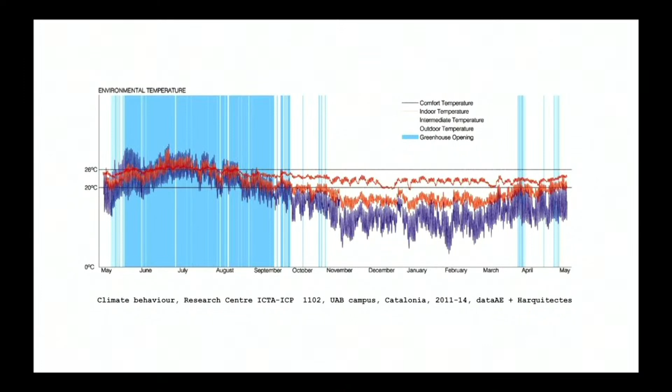In this graphic that I'll show you later, there's an important thing to understand. This shows what is happening in a building and outside during a whole year, from May to May. There are four important things. The first is these two black lines describing the legal comfort range, between 20-26 or 21-27 depending on the regulation.

Then the other lines moving up and down are important. The blue one is the outside temperature, going up in summer and down in winter as usual. The other two lines are very important: the red one is always kept at the right temperature. But the other one, connecting back to the Zanuso house, represents spaces inside the building that are not following the legal regulation of comfort. So it's important to discover where this can happen in a building.

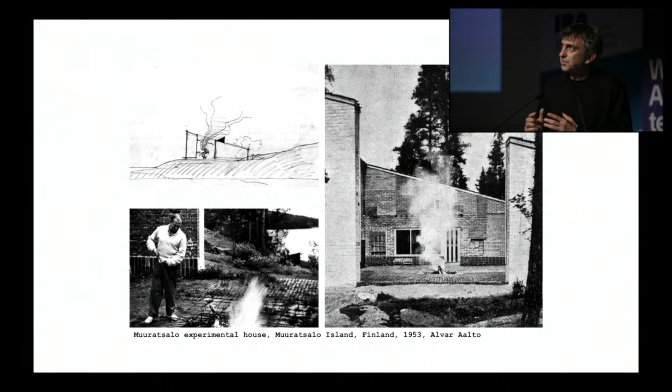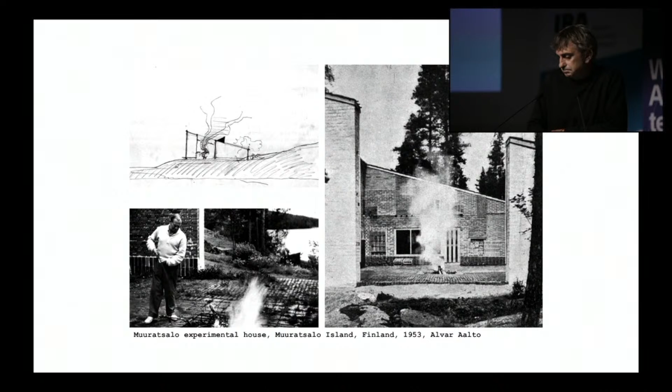Again, it's not only about the weather, it's also about the relation between man and nature, but not in a romantic way. It's more connected to the skin. We are men, we are kind of animals, and we need to be connected to nature. I think that in the case of this fire, in the middle of this amazing courtyard, it's powerful in terms of architecture, but also in terms of what the people there are feeling.

And it's interesting because you can know this story, and that's always interesting, but it's not necessary. If you go to Bologna and face the facade of the Basilica, you don't need to know anything, but you can feel this idea of the passing of time, the things that happened to that building, and after all, the aesthetics of that building. I think that's important. It's not always about rational thought, it's also about your perception.

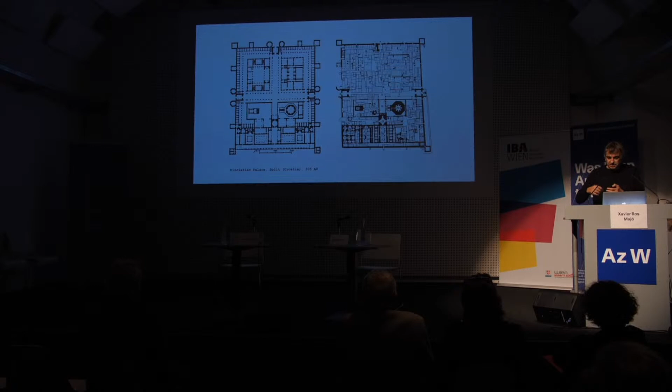Today I visited the Basquiat Exhibition in Albertina's museum. Super amazing, and I realized that you can look at one of the paintings, and if you go close, you can imagine what happened during the painting with different layers, some scratches, and a lot of things, a lot of layers that are involved in the short history of the production of this painting.

I think that in architecture, this could be described with this picture of the Diocletian Palace of Split. There is a starting point, powerful, amazing, very precise in terms of style, kind of building, very homogeneous in a way. And then what happened to this palace during centuries?

Again, it's interesting in terms of history, because knowing things is interesting, but it's not very important, because if you go there nowadays you see these streets, the new buildings that have probably been built using the stones of the demolitions of the original buildings, and we don't know why, but some of them are kept and arrive to our days. So it's a kind of collage, this kind of palimpsest with very different layers, where all of the layers are creating a very specific soul.

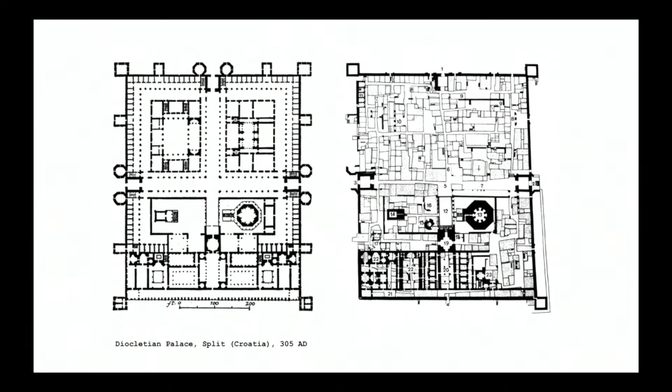Of course, I think the starting point is very relevant, so nothing can be understood or felt without this first step. But after all, it's the mixture of different layers, different constructions, very casual situations that arise and create, in a way, a new thing, where all the things that happen, all the centuries, all the scars of the story are kept there, giving a very specific soul to this center of Split.

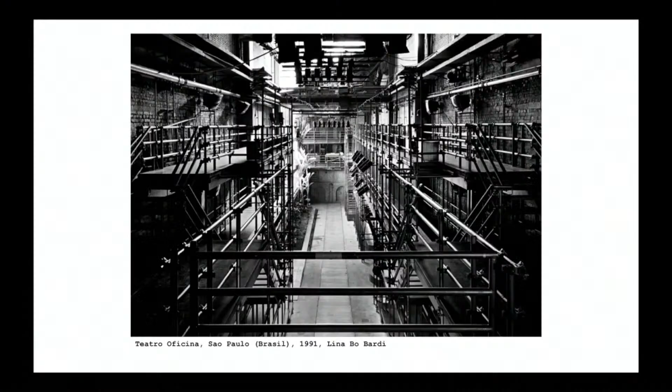And not in a casual way, like the Diocletian Palace, but when working in a pre-existing building, it doesn't matter if it's a heritage building or not. I think that sometimes it's interesting to be bold, it's not a holy thing, so sometimes you need to demolish, transform, add, do whatever is necessary to transform - in this case, burned offices into a new theater, adding this greenhouse facade, the scaffolding, and technical things.

Almost everything is new, but the presence of the old parts, in fact just the party walls, is essential to understand what is happening there in terms of architecture. And it is also interesting, not only this idea of new and old creating actually a new thing, but also to understand that a theater, which historically has been an archetype repeated with some variations.

But with long life, let's say, it can be transformed thanks to the architect - in this case Lina Bo Bardi - who understood or imagined that a theater can work as a kind of long street, and it doesn't matter if it's narrow or high, because the theater that will happen there would be shaped, thanks to the limits of the architecture in a way.

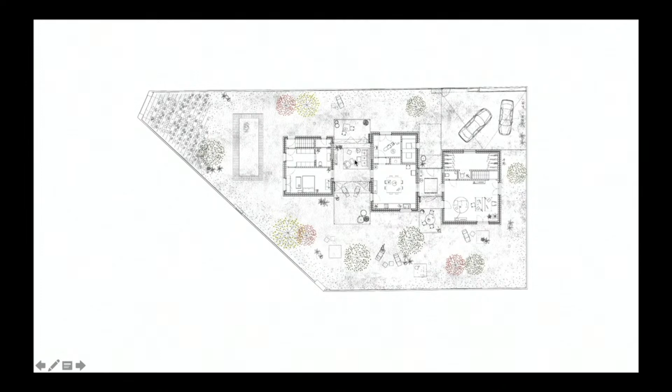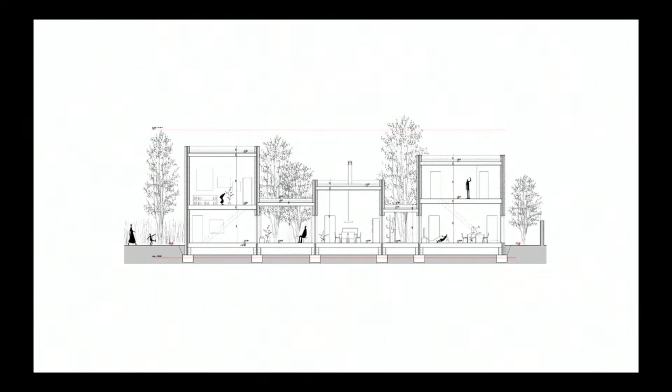You can understand here how simple it is. So the three boxes and the two galleries or porches connecting the two gardens, using a very basic system: flat load-bearing walls, double walls, because there are no buttresses, so they need to work together thanks to very basic steel connections, you will see later, and that's all. So it's a very typical system, as you can see here.

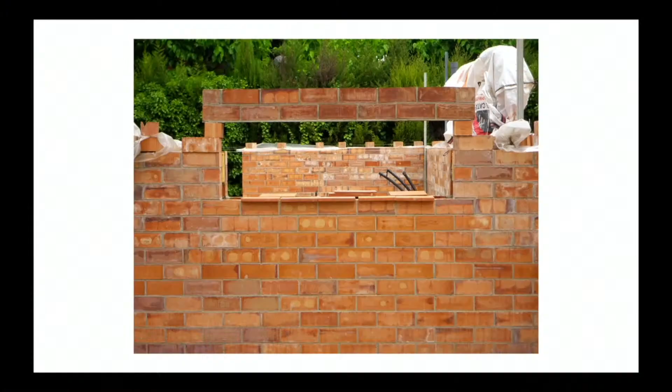These are the connectors, so both of them are load-bearing walls, they are working together. During the construction, we improve everything thanks to the workers, let's say. In this case, we changed the design of the lintels because the worker proposed a solution and we loved it, we tested it a little bit and it works.

The brick is the most basic one. It's for structural walls, but generally covered by mortar or different layers, not in this case.

In this case we decided to keep the same kind of walls without painting in the galleries, expressing this outdoor condition, this space in between. As you can see, showing all the basic systems of construction, having a lot of inertia, which is very good in Barcelona. Inside the boxes, the same structure, the same walls painted white, with just one or two windows per space. And the kitchen, which is very high.

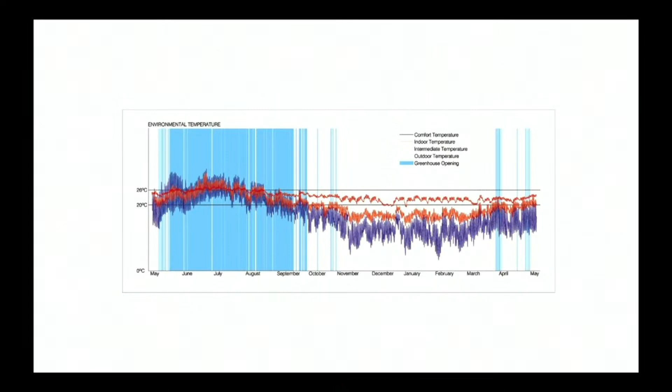In summer, you can decide to be on the ground floor, which is much more fresh, and in winter on the top to have breakfast. So again, it's up to you.

The building is very simple, so we have a heavy structure, post-stressed concrete framework with these columns. We have 4 atriums, vertical patios that connect all the levels and of course work as a kind of chimney. We have these rows of offices made of wood, and then all these spaces that are meant to work in a less formal way are scattered throughout the building.

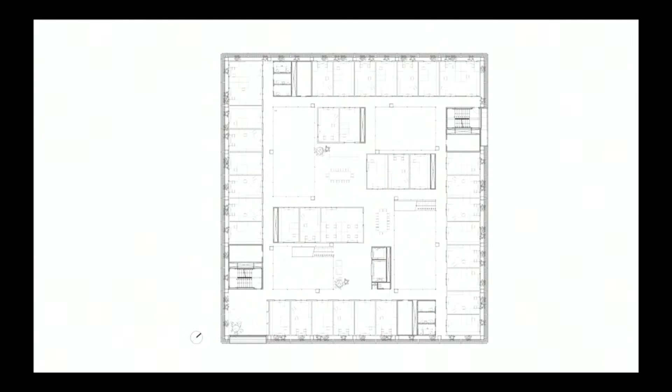Then we have the skin with these polycarbonate windows that can be open or closed. The building works, as I said, as an organism, because in winter it's closed and in summer it's super open. So we have a lot of air crossing the building, and it works very well.

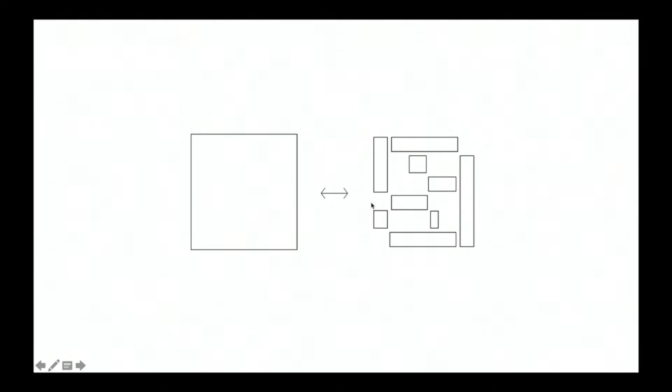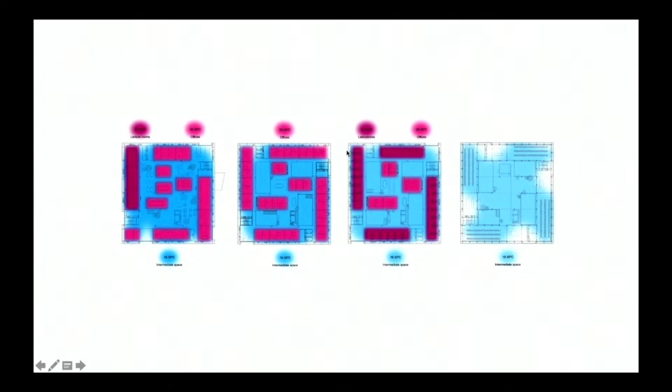And again, in this case, this is the space where the ambition in terms of climate is low. So you need to wear shorts in summer and more layers in winter, but it's the only way.

And this is one of the corridors, and you can see the greenhouse system on top. It's interesting because even though this is really inside the building, the light and air feel like an outside place, and always better than outside.

This is a laboratory, which is a closed system, so we just push the air crossing the slab and collect it in the same system, but you cannot open the windows because it's very specific and clean air. In the offices, a system opens or closes the windows depending on the needs of the people and the conditions outside.

So it's controlled by a computer system. Of course the user can decide if he wants to open the window, but if he leaves and the window is open and the system decides it must be closed, it gets closed. So it's a mixture.

It's very complex, the building, but we made the slab lighter using these pipes where the air crosses the whole building. So when the air is cold it refreshes, and when the air is warm it dissipates the energy thanks to the concrete mass. So it works very well.

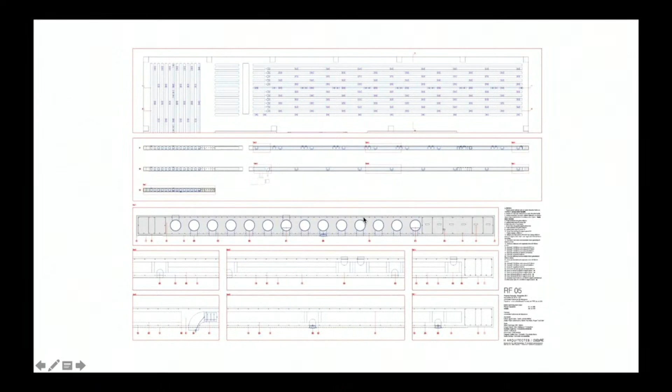And we have a refreshing pipe system on the bottom, and then with the pavement we have a layer of pipes to get warm. And this is the construction.

So it's very complex and beautiful, the picture. And you can see here the post-stressed bars that after pouring the concrete we screw in, and then it has tension to support more distance between the columns.

And this is the result of the building. This is a big campus close to Barcelona, and this is the typical building they have in this campus. This is the energy consumption, and these two lines are the simulation and the real graphic. So we reduced the energy consumption by half.

And I think we increased the real comfort a lot. But reducing it by half means, I think, about 100,000 euros a year, which is a lot. And today the energy cost is very high. This was 7 years ago.

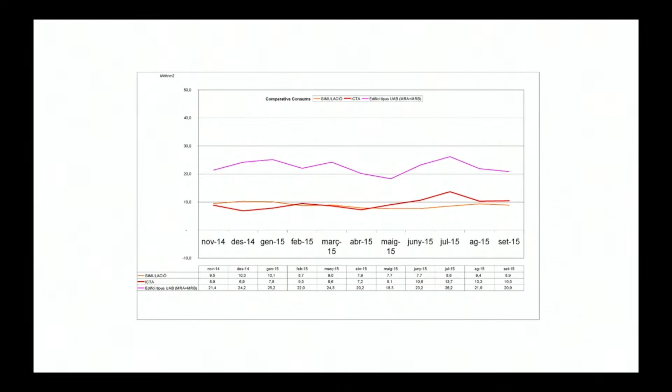Fluid matter, yeah, as architects we generally design not the fluid matter but the solid one. But what we decide about the solid affects the fluid matter totally - meaning the air, the water, and so on.

So in this case, this is a civic center, or kind of civic center, in Barcelona. We create a kind of big tool to improve the temperature. So the whole building is a tool to create comfort in a natural way.

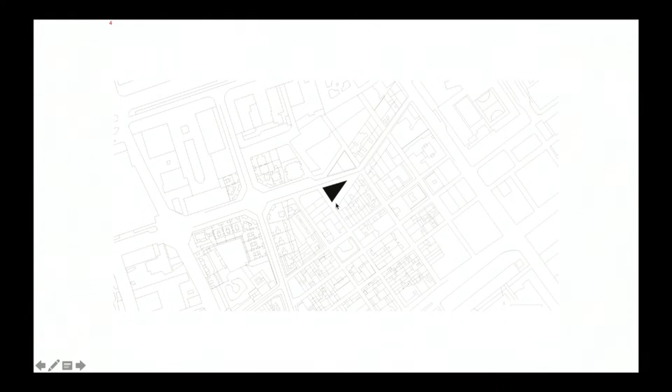This was a former big glasswork factory from Barcelona, close to Diagonal. But they demolished almost everything, and when we won the competition, I think the factory was very, very big, but what arrived to our days is just this triangle - not the triangle, but the single facade, this L.

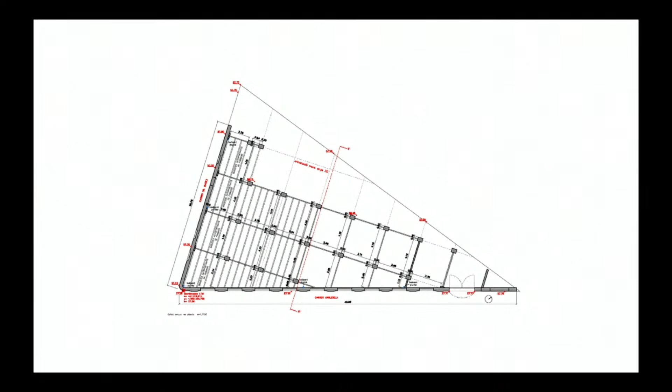And the rest is just a structure to support the facade, and that's all. So we had to demolish all the structure and keep the facade, because it was a heritage facade. So we had kind of conflicts with the patrimonial and heritage people, because, well, it's not an excuse, but sometimes you need to convince people that aren't easy to convince.

Now the thing is we started the project with these big walls that we have here, and we implemented the same kind of walls throughout the whole building to create a new structure. The geometry is very strange.

It's a triangle, and we decided to put a kind of greenhouse on the sunny facade, then classrooms facing this greenhouse, and you'll see these big gaps on the wall that connect with the chimneys, then a corridor, then the small program where the triangle gets smaller. Then another atrium, a very vertical one, that is the entrance. So we used load-bearing walls and massive concrete slabs to have inertia.

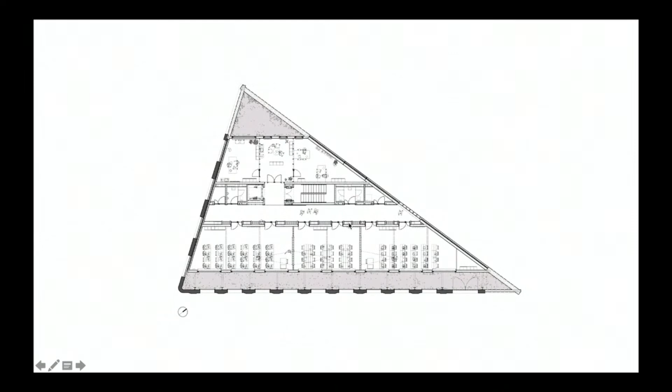So you can see here one of these classrooms during construction. We have this window connected to the greenhouse, and these gaps on the wall connected to the chimneys. So the air crosses from the greenhouse to the gap and goes up.

Thanks to the chimneys. So it's a very risky project because we decided to renovate at the maximum times per hour - 11 times per hour, which is the maximum, using only a natural system.

And in fact, using the sun during the summer, which is the enemy in Barcelona. These chimneys on the top create a very specific landscape in the city, but they are tools that remove the air very fast.

So the air crosses the classroom, goes up through these pipes, and in these pyramids that are the base of the chimneys, the temperature gets very high—70 to 90 degrees. It means a lot. This difference of temperature creates the movement.

And it happens because of the sun. The geometry of the pyramids is the best to have more sun exposure during the whole day. So it's not about aesthetic—it has an aesthetic consequence, but it's a very scientific design in a way.

And it's important to remove the air during the day, and we have also an extra tool to refresh, which is the pavement. We have pipes with fresh water, but not much, for if necessary, and also in winter.

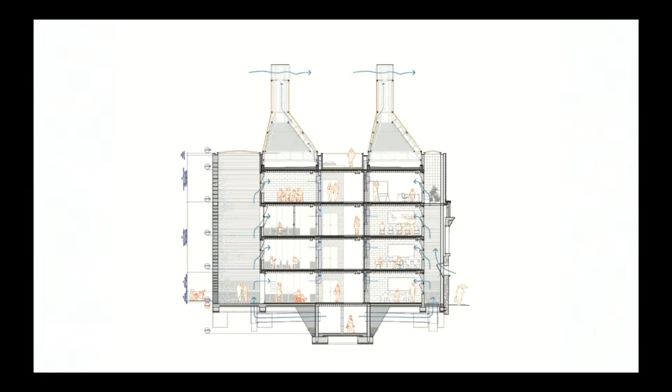But what is important here in Barcelona is not to remove the air during the day because the temperature is so high—it's to remove the air during the night, because at night it goes down enough to refresh the whole building. And to refresh the mass is the secret to use inertia to create comfort.

So the chimneys work also during the night with a very basic system you will know—the Venturi effect. Thanks to the changes of size of the gaps, the air goes faster and it's removed, sucking the air from the bottom. So it's very simple, this is the strategy.

In winter, everything is closed, just to renovate—we circulate the air maybe once per hour, depending on the people in the classroom. In summer, it's always open during the day and also during the night, the same strategy.

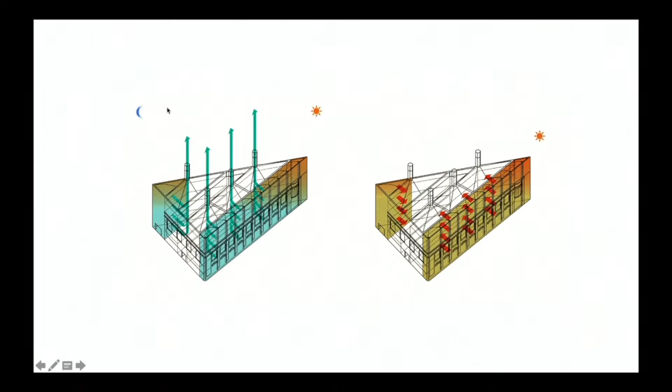We manage these schemes and simulations using engineer software. We don't know how to use it, but we make all the decisions about that. We put options on the table, they study them, they improve them, we discuss. We're at the same table and the same level, but we make decisions because it's about architecture and we are architects.

We do this kind of drawings for El Croquis magazine where we try to express everything related to architecture—space, structure, proportions, air flowing, temperature, everything.

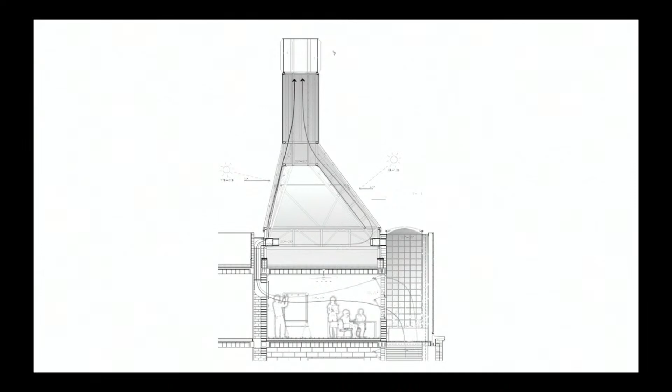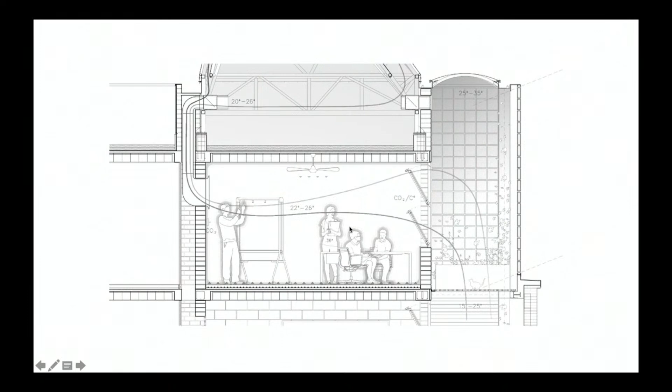But focusing mainly on the people, because people are our target. So architecture is not an excuse—everything is decided around the experience of the people, and experience means all: space experience, skin experience, feeling, temperature. So we actually believe in a kind of global atmosphere where everything is involved.

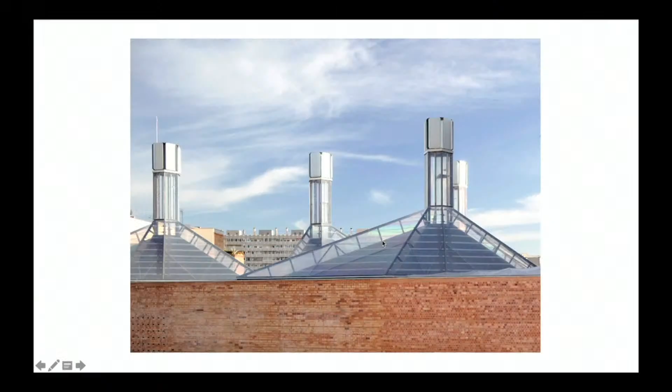So we try to draw it in these drawings for El Croquis for each building. You can see here the chimneys with this black membrane, and the air that moves between the black membrane and the HVAC and the chimney.

As I said, we have a heritage facade here, and we increased the height of the building and the chimneys. So for us, it's important—we started from an old facade, we create a new one using the old, so everything is new here. And you cannot understand what is happening without feeling the important things of the old part, but they are working together in all the ways.

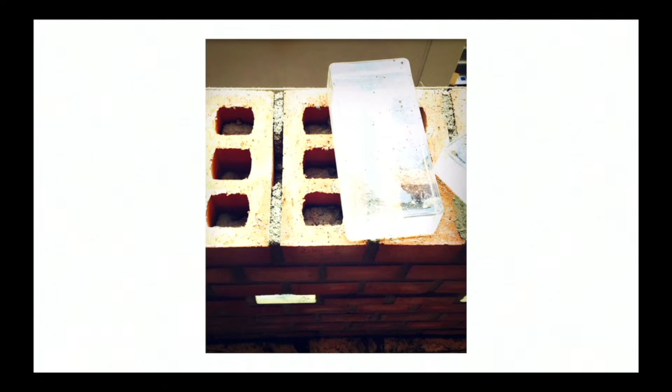I told you something about that using Lina Bo Bardi's Teatro Oficina—it's an important idea for us. So for us, working with heritage or not-heritage buildings, just a pre-existence, is always an opportunity to transform, because we need to give a new life to the building, so we need to be valiant to make good decisions on that.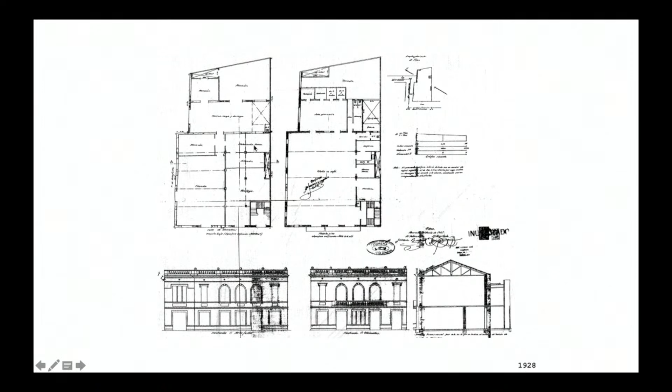We had on the ground floor a shop, and on the first floor a kind of theater. The rest of the building, you can see here the shop and the theater with these wooden trusses that are still there. Then the rest of the building was a kind of spaces to support the theater - I don't know, a kitchen, small pieces, and the rest was for storage, so nothing interesting. Everything was almost destroyed by the second uses of this building.

So we arrived there in 2012, I guess. The building was divided in 3 parts: the main one, the more public one, and the rest, these 2 parts. Our strategy was to create a kind of new street where the users can fastly be orientated inside the building to know where to go, because it's a center used by very different people, new people and common users. So it was important for us to make a clear decision: to create this street thanks to a demolition, a total demolition.

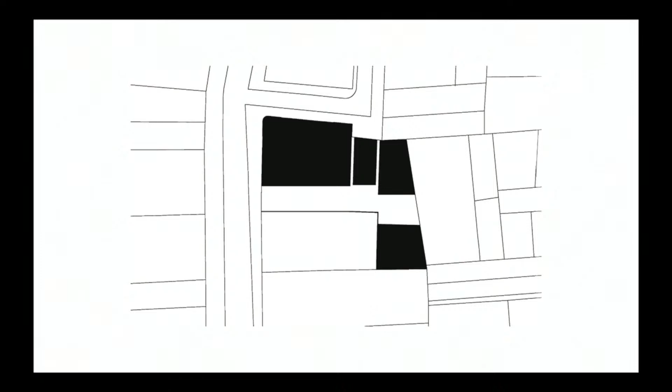You can see here that we proposed this demolition, and we also added a very strategic element inspired by Teatro Oficina of Lina Bo Bardi - kind of a scaffolding, where everyone can recognize where to go. The stairs and these kinds of passerelles, everything very fast and very easy.

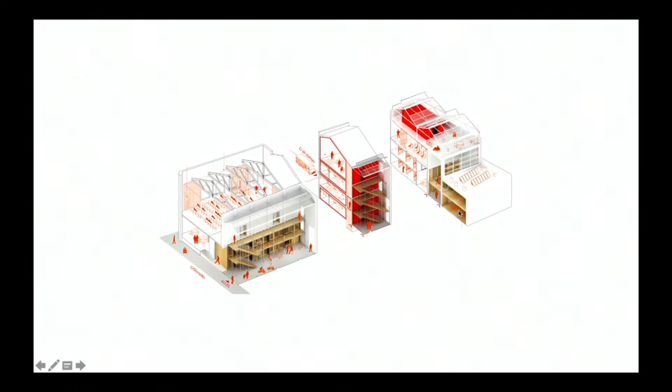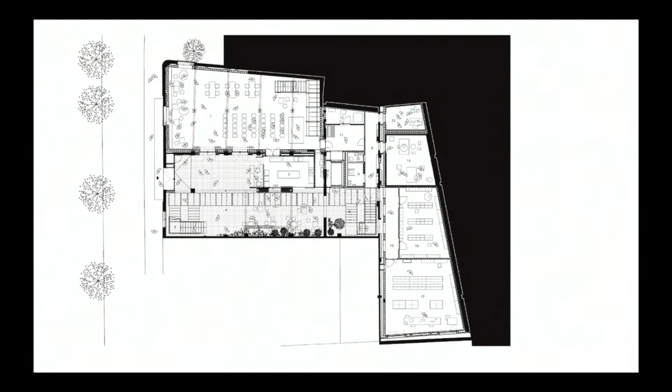Everything here is almost old, and everything here is almost new. But also in this part, where the structure is totally new, you can recognize the original elements that create a very special atmosphere effect. So you can recognize this street, the different pieces - so not very interesting in terms of plan. This is the main strategy: to transform and recover the theater and the former shop, and to demolish all this part.

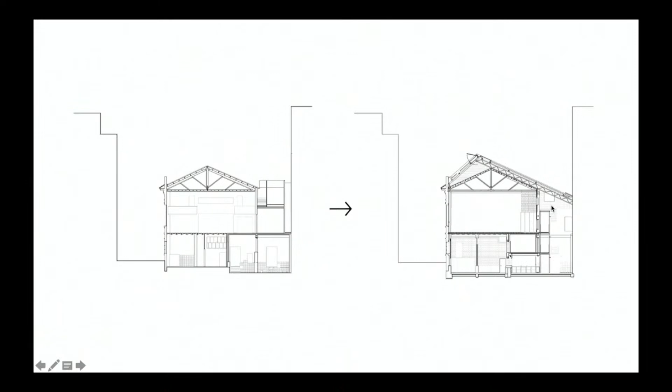As in the Chimneys building, the roof becomes more simple, but still a chimney. So we have an air chamber here, and the air crosses the whole atrium and goes up thanks to this window. And you can see here again the original facade and the new things, but working together as a totally new building.

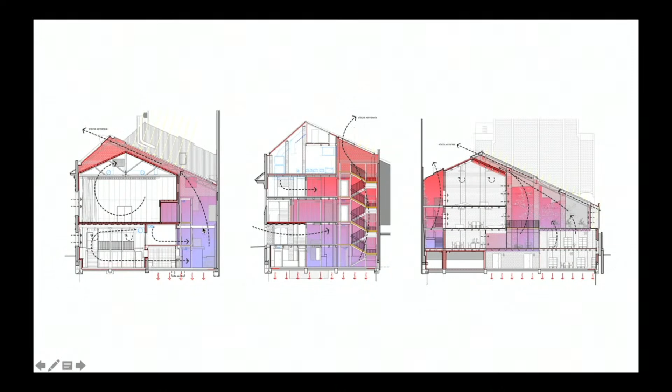Again, the strategy is the same, trying to understand where we don't need artificial climate. In this case, we need artificial climate in a lot of classrooms and so on, but the thing is that we push air inside the classrooms, and the air goes outside and is removed in this street. So we improve the temperature here thanks to the artificial systems that we have in the inner parts.

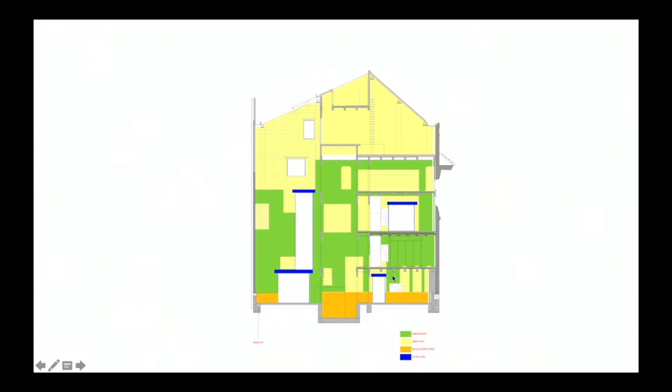If you look at this moment here, with these 3 windows, new door, green wall as original, and the new one in yellow, and this kind of plinth that you can see here, the old, the new, the plinth — everything is working to support the slab. So it doesn't matter if it's new or old, it's the same, it's a wall, it's a load-bearing wall. This creates, for a structural strategy, a very specific aesthetic effect.

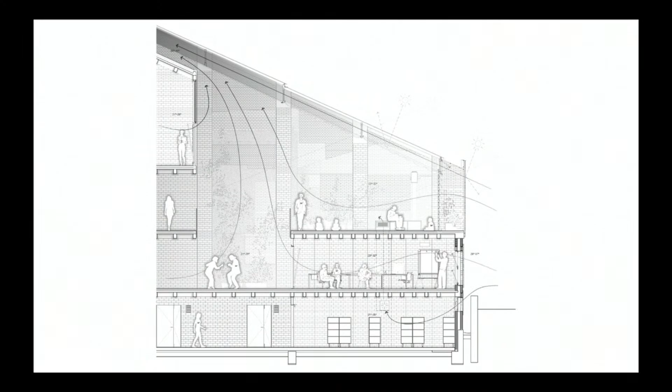This is one of the main spaces of this project, where you can see the drawing, the people, the air, the systems, the temperature, everything described in the picture. The truth is this is the new part, but thanks to these big gaps, it's not possible to understand the building as something new. Trying to keep the spirit of the original building was something important for us.

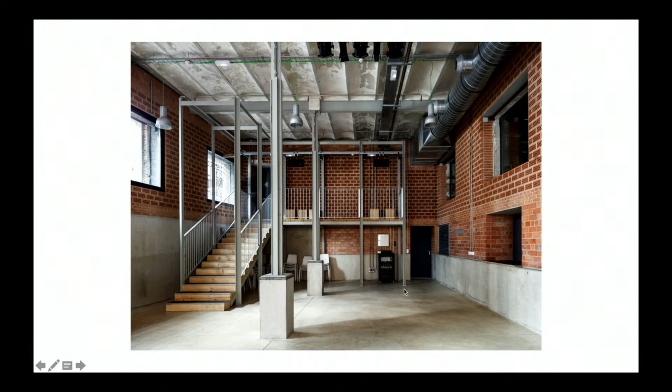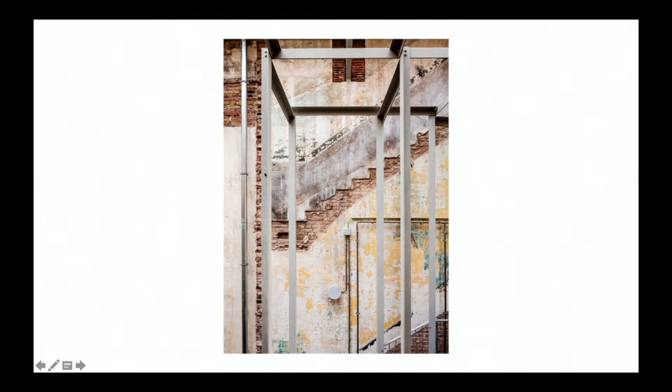This is the atrium. There's the entrance, the original party wall, and the new scaffolding, the passerelles and the stairs. So it's very easy to understand how the building is organized. These scars and cracks from the process of demolition are kept there, creating a very special atmosphere, mixed with new structure, new bricks, and the scaffolding structure of the stairs, and also all the systems for light and so on. So everything is new, but nothing could be understood without the old parts.

I will not explain every brick, but every brick has an explanation, because it's a good way for us to make decisions — to give reasons why we use less height to connect with the irregular skyline of the original wall, why we use the cheapest brick for the structural wall, why we use this U filled with concrete and steel bars, etc. There's always a reason why we use a certain size — the Catalan size, quite bigger than the Spanish one we use for the new structure.

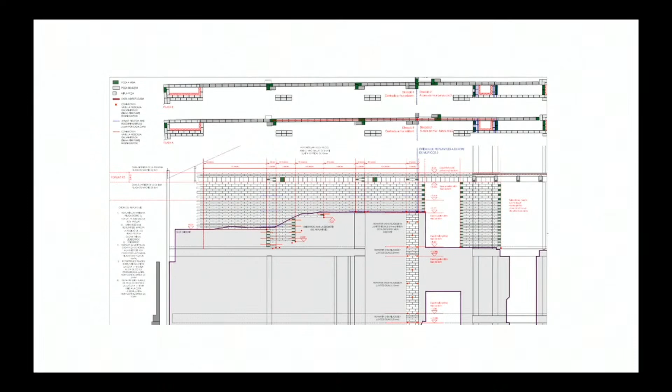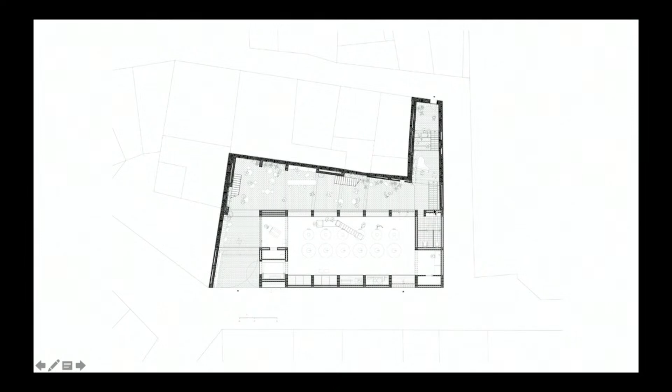Very fast, because I decided to include this project since it's a new one — the idea of total space, which I explained a lot about. This is the idea that everything is involved in the space, and in this case, for this project, which is a winery in the south of Catalonia, in a very special area called El Priorat, a wine region. The project is very simple: we have the hall to create the wine here, and then there's a kind of street, a corridor surrounding this box — a very specialized box, a kind of cathedral for wine, and that's all.

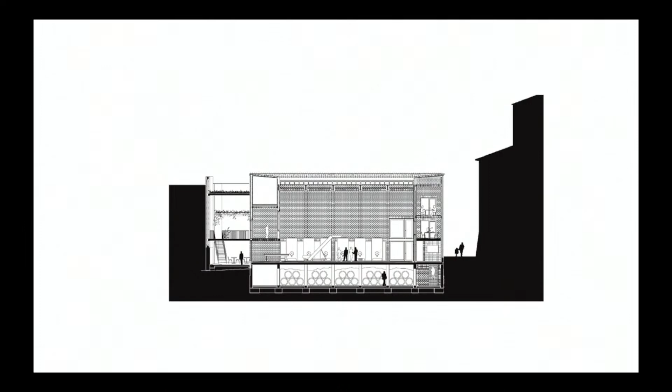So we have the wine production here, where we have very high demands in terms of regular temperature. It's very important to have very little variation of temperature during the year. This is the section for this kind of street where everything is open, just roofed, and that's all. The ambition here was to create this total space, a kind of super height, because the air increases in temperature here and goes up, then is refreshed and goes down thanks to these chambers that are between the walls.

You will see later a very simple system, with more layers on the south with the sun and fewer layers on the north, and it works very well. After 2 or 3 years, the temperature is very, very regular. The tanks have a kind of serpentine to change the temperature artificially, and it's mandatory — there's no other way to make wine.

It was not necessary to have very regular temperature because we have machines. But if you create a good atmosphere, a good temperature, you don't need to use a lot of energy to create artificial temperature in these serpentines that surround the tank.

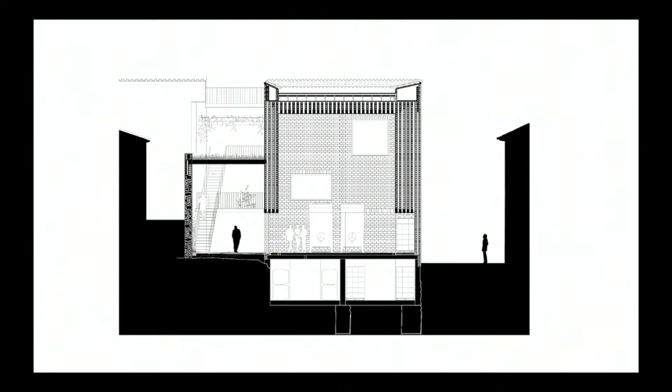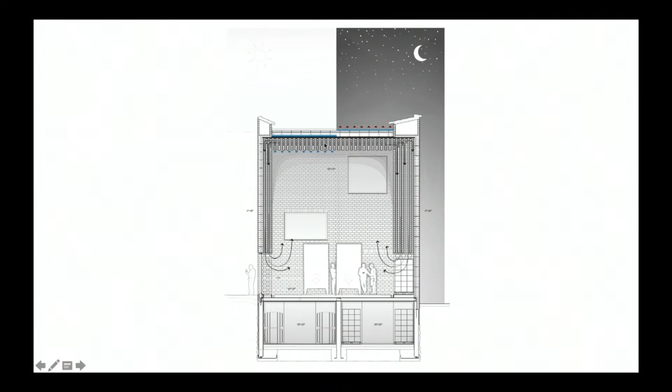And it happened, really. The system is very simple, always the same: hot air goes up, and when it's refreshed, it goes down. In this case, using a layer of water, it's a complex system but easy to understand. We have water during the night on the top, outside, that gets fresh, and we put the water inside during the day. So when the air goes up, it is almost touching the fresh water, and it refreshes more, and it goes down. So the temperature is super good inside.

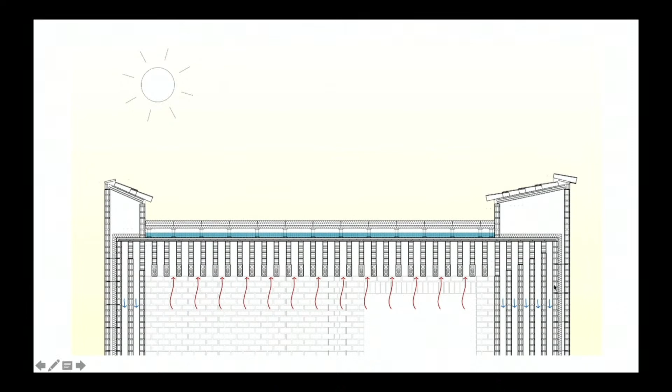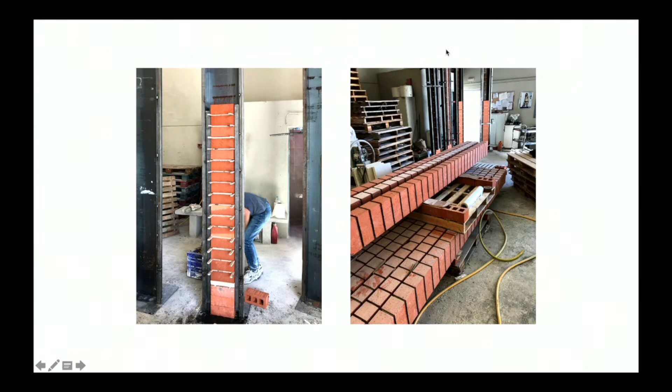I will focus very fast on these bricks that you can see here, filled with concrete and some steel bars, creating beams made using bricks. You will see later these beams are supporting the whole walls here. This is the system: we put the bricks one over each other, then we put the steel bars, and then we pour concrete inside, and after that it starts working like a beam.

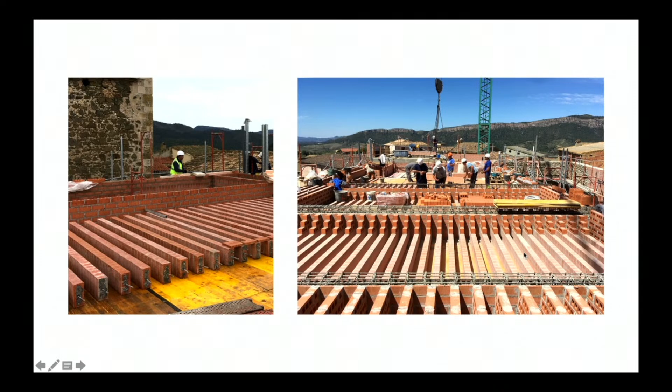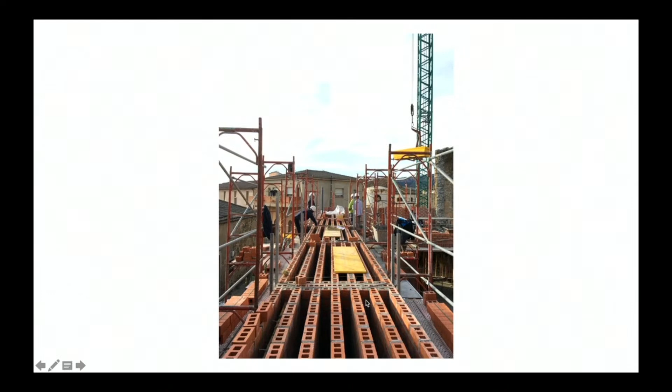We did it in a factory, and then on site we put all of these beams on the ceiling of the hall, always defining the 80 layers that we have in this building of bricks, all of them different. So we drew all of them. This is the thick wall facing the south.

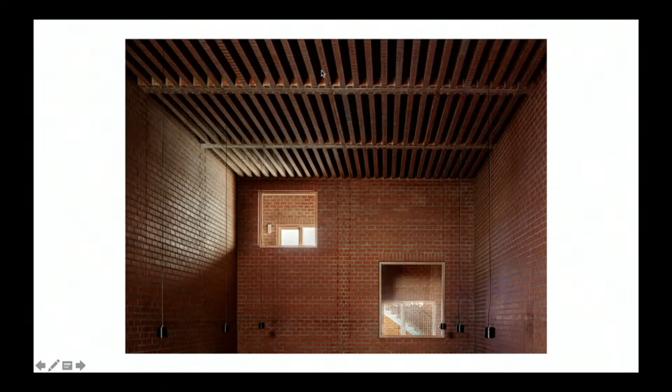And this is the project after the completion. You can see here the entrance, some views in the amazing landscape, the connection between the street and the hall of the cellar. You can see here the beams that I showed you before. So yeah, it's a tool to create comfort, but of course it's a space in itself, so you feel very special when you are there.

And this is the water on the top, a thin layer. Yeah, and this is the last part - just one project and two evolutions of this project is to reuse.

This is a house in the north of Catalonia, in Empordà, a very good, beautiful area. It's a medieval village, totally protected, so in terms of heritage it's very difficult to work there. Our plot is not in the center, it's just here, but it's also under the regulation of heritage people again. In this case, we have this narrow street with this very beautiful wall made of stone, the typical one.

And somebody, I don't know why, decided to enlarge the size of the street. This is a street, and we need to demolish the wall. But they want the wall rebuilt. We said it's not possible to do the same, because we are not in the 300 years before - we are today. So we don't know this technology, and we don't want to do so.

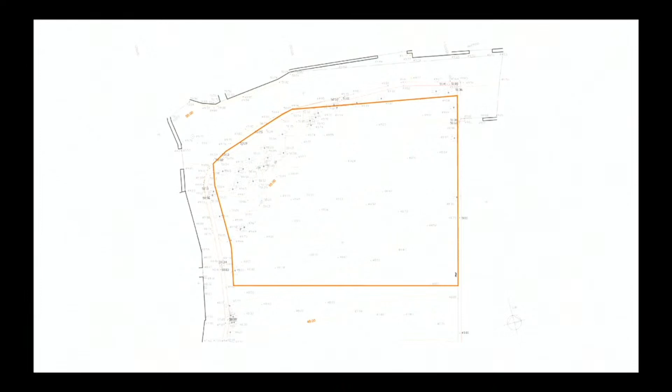So this was a starting point - to demolish the wall. So we have a lot of stones there. And the idea was how to create a new wall using today's technology, creating architecture from this, let's say, not the best starting point.

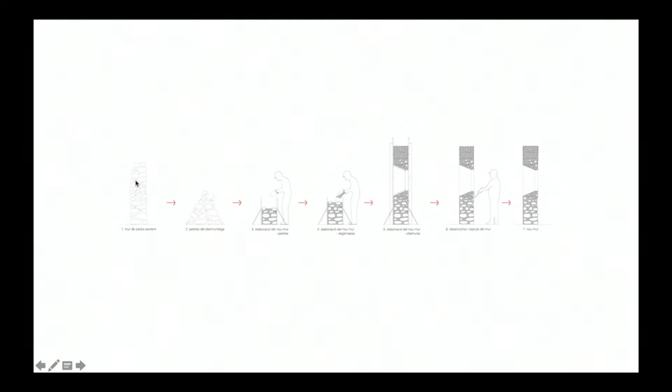So we create a kind of concrete using lime, reducing a lot the cement. We also use, to insulate, a kind of rice made of glass with air inside - inflated glass, let's say - to insulate. And we use also the sand of the plot, so we create a very specific mixture of materials, using, of course, the stones from the demolition of the wall.

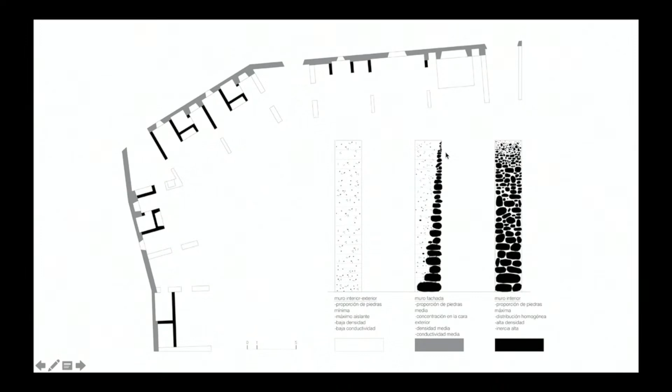And we don't put stones in these walls that are separating inside and outside, because this is a porch, an open porch. And you will see that after the completion of the wall, we use a bush hammer to recover the stone in a way - you will see. So this is the original wall, and this is the new house.

So as I said, the house is like a wall with a structural purpose. For us, it's important to understand that the structure could be the space itself. So everything is structural here, almost.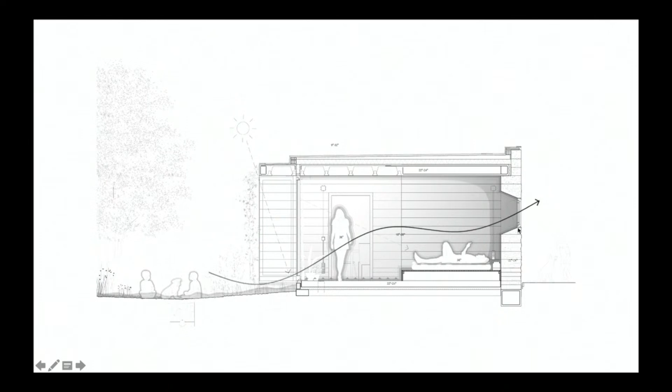Again, it's just to protect from the sun in summer thanks to this eave, very basic. And then we have massive elements here and cross ventilation, with just a few gaps on the north to create this ventilation.

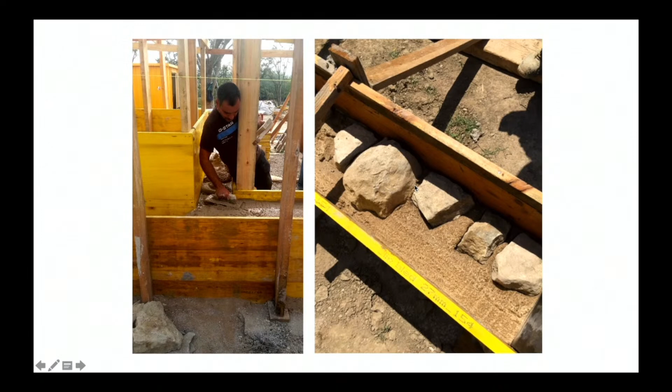This is the construction. This is a facade wall, so all the stones are placed in a very precise work. You can see here, it was not a fast system, but it was the good one. And they enjoyed doing difficult things, after all.

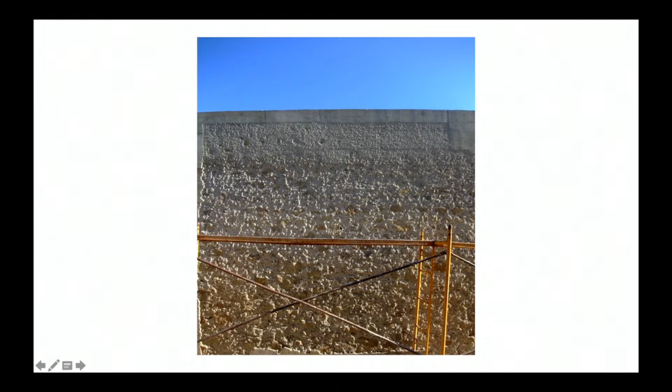And this is what happened after bush hammering the facade. So the stones start appearing there in a subtle way, but it has a very good effect. This is the picture, so the truth is that everything is more mixed, not this kind of contrast, but this is the north facade, as you can imagine.

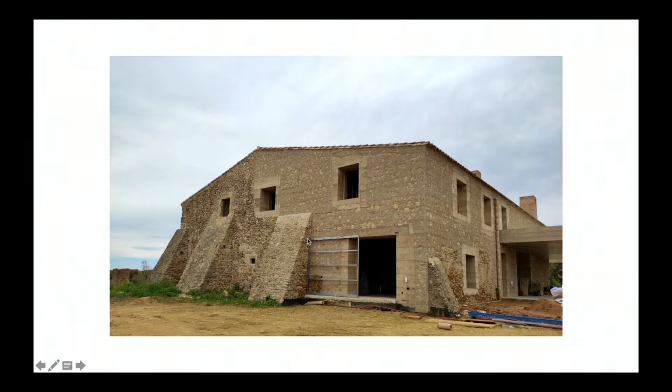And this is an evolution because this is in the same area, but here we use Portland cement, not lime, because we have more height, and we put stones inside because it was a kind of demolished former country house in the same area. So in this case, it's new and old, but using not the same system, but I think that it works very well together. And again, the kind of architecture is related totally to the material and the structure and everything.

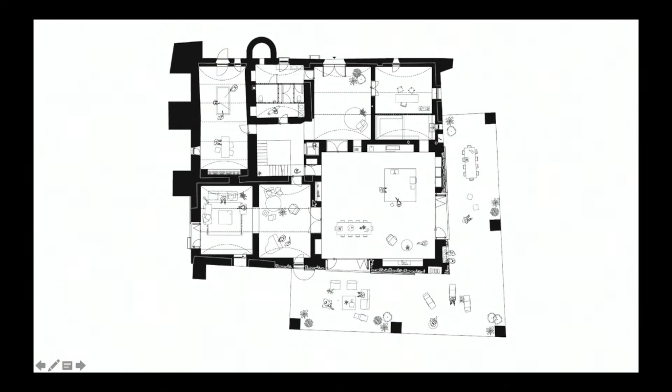And this is the last one. Again, the same idea. In this case, for social housing in Mallorca, a very small project for 25 apartments for elder people. We have a building there that it was mandatory to demolish. It was a competition, so there was no option.

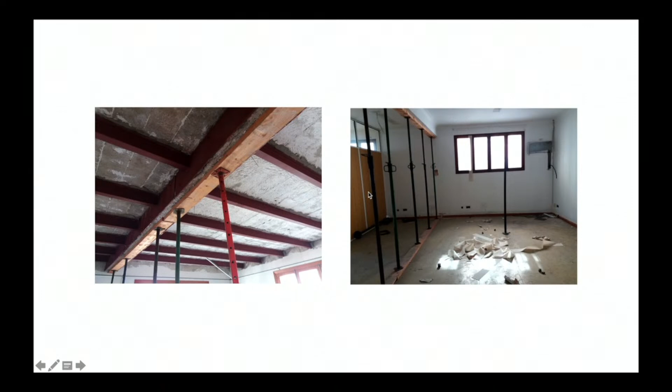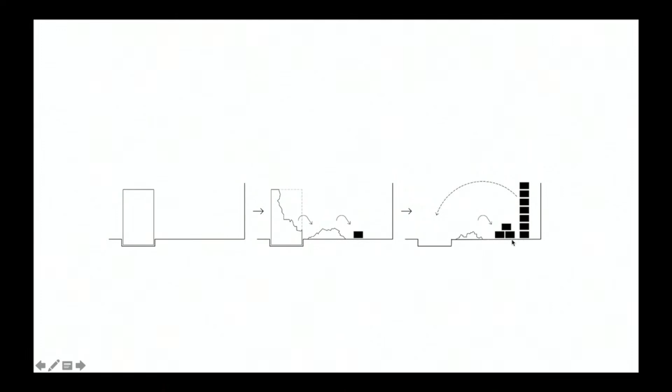We need to demolish, it was in a bad situation, so it makes sense, but we keep this sandstone from the load-bearing walls. We kept the stones, and as you can see here, we demolish the building, we keep the stones, and we create a kind of big bricks, putting the stones mixed with lime concrete again, but prefabricating all the blocks. This was what the briefing of the competition was expecting, a wooden building to be very fast to build, but this was our proposal, to use these prefabricated big bricks.

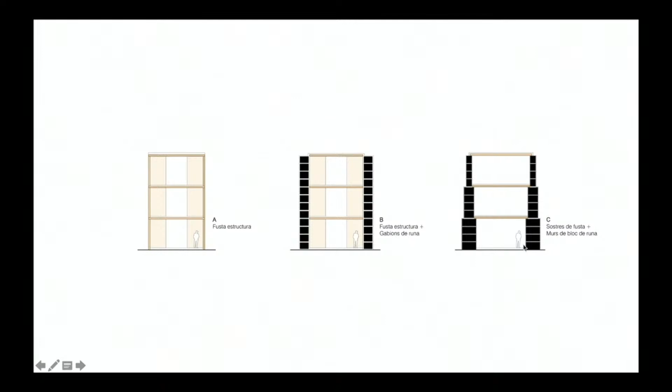So this is almost the last section. You can see here that in each level we reduce the depth of the stones. And again, this decision influenced everything around the project, everything.

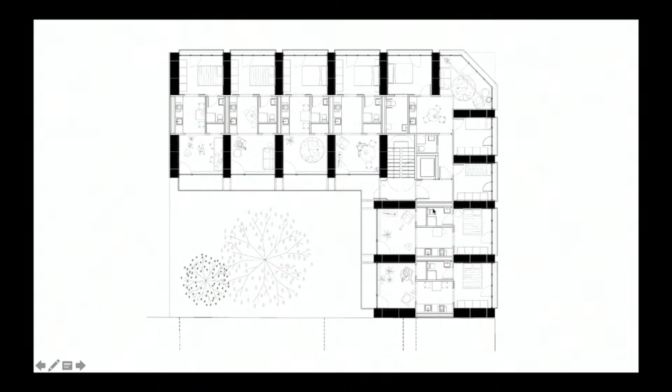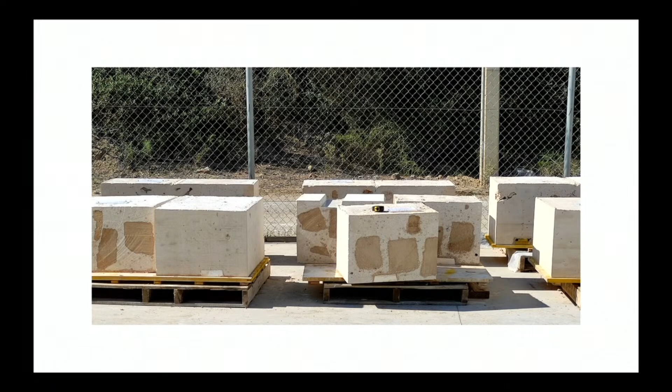And these are kind of proofs that we did one year ago. We changed the system because theoretically we started doing a kind of specific plywood frame to pour concrete inside piece by piece, block by block. But then we had an idea, and we created this kind of big pools, 4x4.

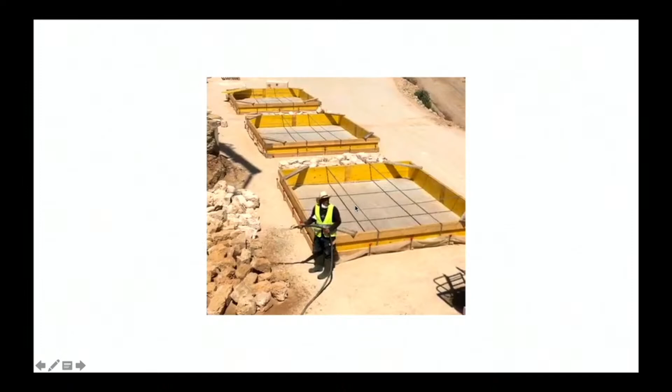We put the stones inside, and then we pour concrete. And after that, we cut with this big disc saw. Looks very fast, but not very easy. Now we start having an amount of very strange blocks, but very beautiful.

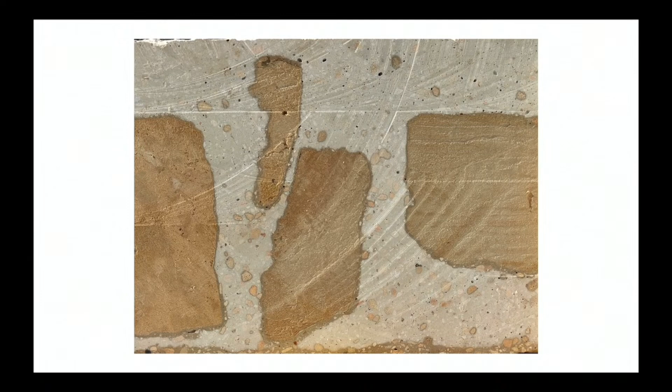So again, this is a wet one because you can see the water between the limestone and the lime. I mean, I said limestone, it's not the word—sandstone. Sorry. And the lime concrete, using the rests of this stone for the sand and the gravel, are from the same material. And you can see here the signs of the disc.

So, and to end, La Bona Vida in Catalan means something like good life, but in English could be to enjoy, because we are very rational, sometimes sensible, but very rational. We can describe all the buildings in scientific, climatic, structural, blah blah blah way, but we actually love this idea of good life, of enjoy.

And year after year, twice per year, I think, before summer holidays and before Christmas holidays, all the office, we go to visit the works under construction or completed, not a lot, because we are a small office, so 2 or 3, depending on the year.

We go there and celebrate, I think, our success, because for us to share this lunch with the owners, the ones who suffered our way of working—we suffered them too, but for us it's amazing. I think it's not only about enjoying architecture, which is our main goal, but also this idea of being a team. Today I'm here, and you might imagine architects associated just to me, but this isn't the truth. We are 4 partners, 2 others who aren't partners but have worked with us for 15 or 12 years, and at least 15 more people, young and not so young. We are a team, and if you are architects, you know it's not easy to build buildings. It's very difficult, so we suffered a lot. If you're ambitious, it's even more difficult. I think our success is because we are a team, we share everything, and we work very hard, and you've seen the result of that. So I'm done, thank you.